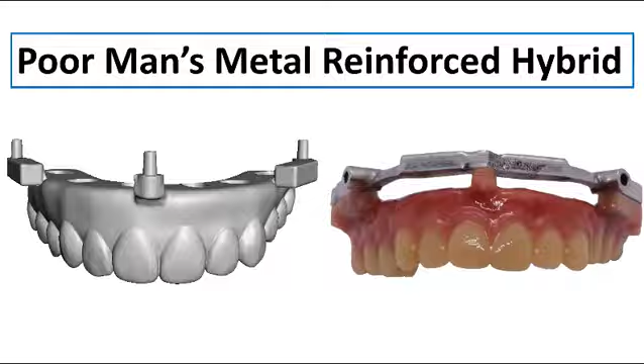Many of you may know I do a lot of immediate load implant cases where we have an immediate load restoration made ahead of time, and generally we print these. The downside to printing is that you don't have anything super strong reinforcing that, and there's always the potential that you could crack this thing through and through. So today I'll show how to use a cheap titanium plate that anyone can obtain off Amazon and build that into this hybrid so you have a super strong restoration that's very difficult to break.

Full disclosure, this is the first time I've ever done this, and I'm just documenting it because I know it works. It's not really a question of that. But I was doing another project, and I happened to get on Amazon looking for a small piece of titanium plate, and I was amazed at how affordable it was.

You can find these 2 millimeter thick titanium plates on Amazon, about 100 by 100 millimeters, for $10. That would be enough titanium to reinforce 5 to 6 restorations, so we're talking about very minimal cost. What we can do is trim a shape to fit into the hybrid so we have that metal reinforcement. It's titanium, so it's super strong.

Honestly, I don't even know that you need the full 2 millimeter thickness. I think a 1 millimeter thickness would probably get it and be a little less trouble.

Just to give you the big picture of the process: we take our hybrid that we've designed—in my case a stackable hybrid to go on a guide, but it could just be a routine full contour hybrid with no stacking—and design and 3D print a template that we can lay onto the titanium plate to trace the outline. Then we trim that titanium plate to the correct shape and print the hybrid with the socket for that plate to go into.

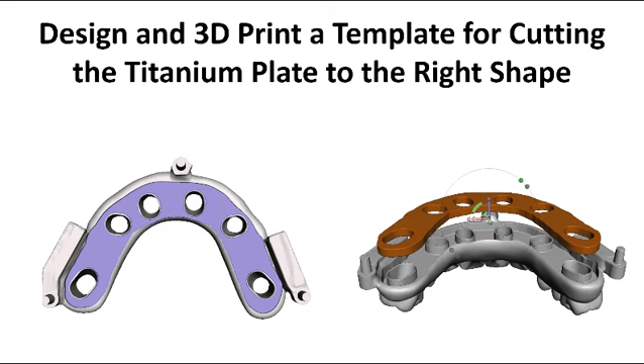Here's the idea: you can see I've printed my template, and we'll go over how to make that in just a moment. What you want to do is trace the template out—I used a round burr here because pencil rubs off pretty quickly. I tacked it down to the plate and went around with the round burr, tracing the outline as well as my pickup holes. Here you can see that it's been cut to shape.

This is a very fast technique in the software part, easier than a lot of others I've shown. The downside is that the cutting is by no means easy. After going through about 25 round burrs just to get about 5 millimeters of my cut done, I thought, this is not working. We've got to use some real tools.

So what I'd suggest, and this is the only real downside in my mind, is you're going to need to use an angle grinder to cut the outline, then come back and use a drill press for making the holes. You'll save yourself a lot of effort in spent burrs and that kind of thing. So you might want to have some real tools, and they're not expensive to get.

Once I had cut that titanium to shape and test fit it into the restoration, I knew it was fitting. I just thought it'd be cool to go ahead and anodize this.

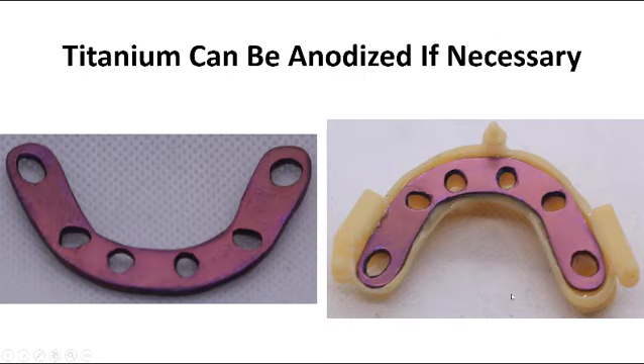Being titanium, that's one of the advantages over other metals, we can easily anodize different colors onto it. Since I'm going to be wrapping this in some pink resin, I thought it'd be good to make the bar pink so there's not any metal show through. If you don't already have a titanium anodizer, this is actually the unit I have.

Let me throw out the disclaimer that you probably should warn your husband or wife before this bill shows up on the credit card, because when I ordered mine from Painful Pleasures, I got a call. I'd used the Blue Sky Bio credit card, and I got a call from our general manager asking what I was spending Blue Sky money on. So I had to explain this is a titanium anodizer used in the piercing and jewelry supply business. I guess if you get a titanium belly button ring, you could have a different color for every day of the week.

But it's a super easy process. You can see this is $250, not a big investment. This will let you anodize titanium, anything you've got, custom abutments, reinforcement bars, all of that stuff, to a whole range of colors, basically every color in the rainbow. So you might want to look into this if you don't already have one.

I turned the bar pink, then went ahead and cemented it into my restoration that had the socket. I use a dual cure resin cement for that, because if you try to use just printing resin, there's no way you can cure through that bar to get the interface where it's bonding to the restoration. All that light's getting blocked out. So cement the bar in place using a resin dual cure cement.

After that's been done, I want to go ahead and fully encase this bar. So I chose to use Saremco denture-base resin. This restoration is printed out of Saremco's Crown and Bridge material, Crowntec. So I just used their denture-base resin and wrapped it so it's fully encased in resin, and I can get nice, smooth, polishable contours on it.

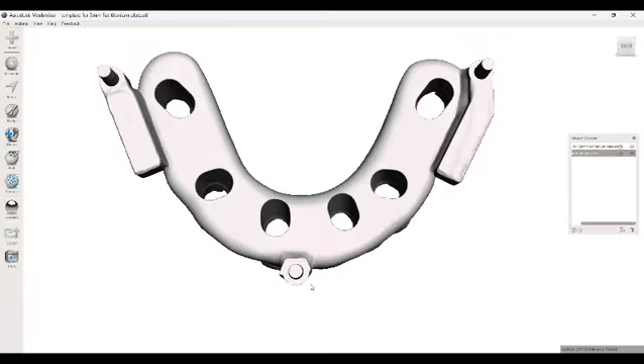So here you see this restoration. This is how I designed it, and right now this would be fine if you were just going to print or mill this, but there's no reinforcement of any kind in this. I've shown on many different videos a lot of different ways you can reinforce this—you can use Trilor, fiberglass, a custom metal framework. There's so many options. Again, this is just adding one more option to the toolkit.

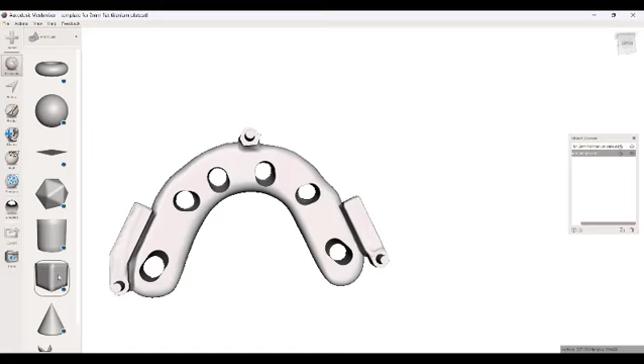I know this plate is 2 millimeters thick, so I need to create something that will fit inside of this restoration and have about 2 millimeters of thickness. So what I'm going to do to start that process is take this, and using Meshmixer, grab just a primitive shape here—this is a cube—and drop it onto this where it's going to be oriented pretty flat to the bottom of the surface.

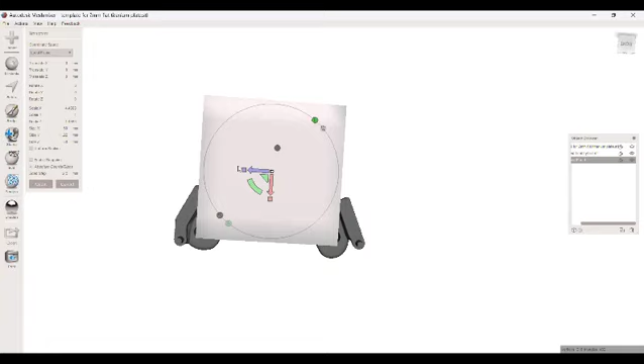We'll accept that. Now I'm going to go ahead and expand this—we'll make it maybe 50 millimeters by 50 millimeters. Then you can just scale it manually to whatever distance you need. As far as the thickness, my plate is 2 millimeters thick, so I'm going to make this plate 2 millimeters thick.

Now I'm going to move this thing down, and if I need to, get it a bit more flat to the surface, I can do that. I pretty much want this as flat to the surface as I can have it. All right, so that looks good.

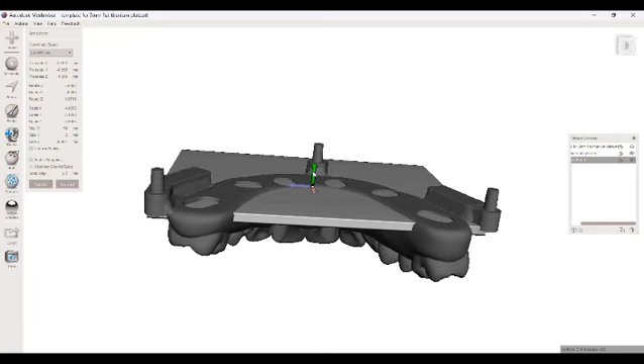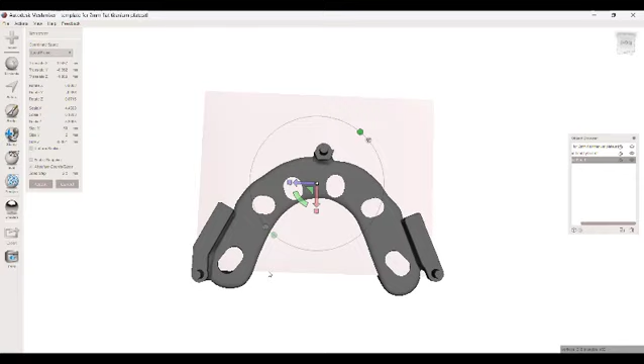I'm going to move it down just a little bit deeper into the restoration. You could even go deeper than this—in fact there's some advantages, you'll have a bit more thickness of material once you wrap it, because if you leave that wrap resin paper thin, there's a decent chance it could flake off. Okay, let's go with that right here. Also need to move this just a little bit this way.

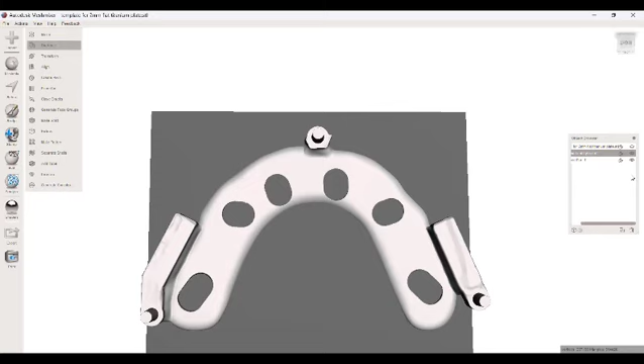All right, so now we've got a 2 millimeter thick titanium—well, this is not the titanium plate, this is kind of mimicking that, okay? What I want to do is a Boolean intersection, meaning wherever these two objects touch, it's going to get rid of everything else but that. But before I do that, I want to keep one of my hybrids in its original form. So I've got it duplicated, and now I'm going to go ahead and do the Boolean intersection.

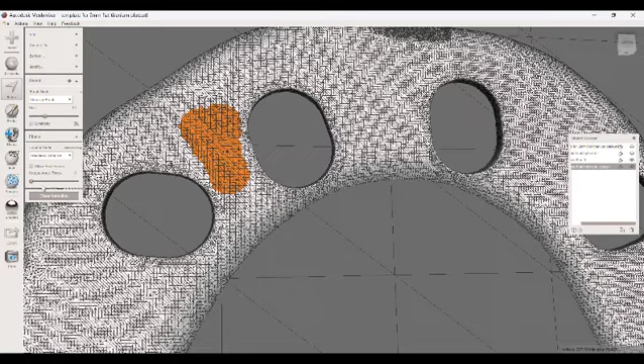Now, before you just jump to that, one thing that's good to know is if I turn on the wireframe, you can see my hybrid has an incredibly dense mesh of triangles—very high detail—whereas this has got just these ginormous triangles, not very refined. From experience, I know that Boolean functions don't seem to work well in Meshmixer unless you have similar triangle counts on the objects.

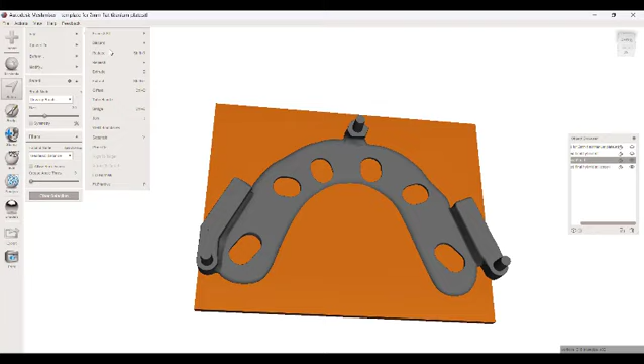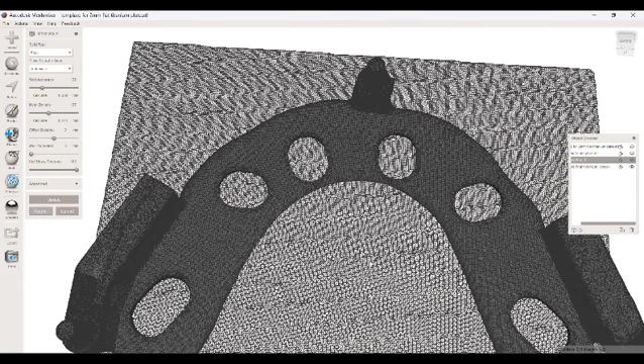So there's a couple of ways I could do that. I could just Control A and go up to remesh and increase the density of the mesh. But I've also found an easy and quick way is to just make solid—do you see how that basically kept the exact same shape, but now I have a much denser mesh? I could further increase that by increasing the mesh density and sliding this. So we'll accept that, and now this will perform much better in that Boolean intersection.

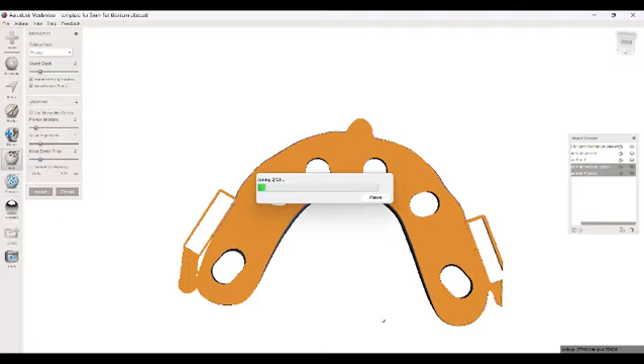It doesn't really matter which one you click first, but I'm going to control click both of them. When I do that in Meshmixer, you'll see Boolean intersection—go ahead and choose that. And there you see it's finished. I'll go ahead and accept that. And there we have it.

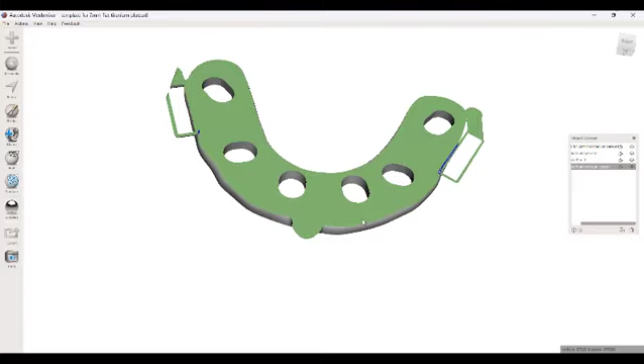So I could go and manually trim off these things, but let's go back and turn on our original hybrid right now. I don't really want this thing to go all the way out here to the edges—I want to leave that a little bit shy so there's no show through of that. So I'm not going to just make this the final template. If I was going to, I could simply cut off some of these little nubs and we'd be off to the races.

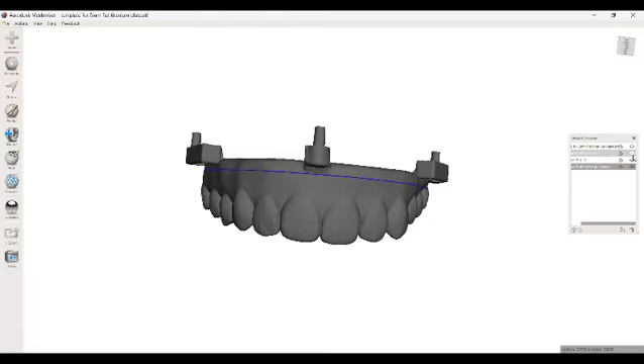Instead, I'm going to choose this face group that was created, then hit invert, which selects everything else, and delete all that other stuff. Now you can see this represents just a two-dimensional slice right through there in the restoration. I want to leave some thickness of the resin on the facial in particular.

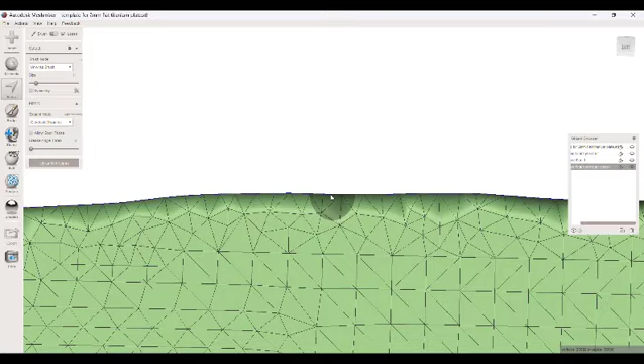So now, using my select tool, I'm going to double click one of the edge triangles. Sometimes it's helpful to really zoom in here. Double click that. Now I'm going to increase that selection - hold down shift and hit greater than. Your alternative way of doing that is to go under Modify and expand the ring, and just repeat that several times.

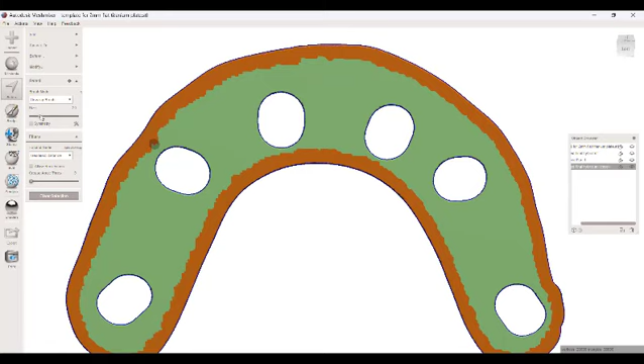I want to pull this in from the edges a decent amount. And if there's anywhere that I'm starting to get a little thin around my holes for the pickup holes, and I want to maintain some strength, I could go ahead and just erase a little bit right there, and maybe right here as well, and maybe in one more spot right here, and maybe right there as well.

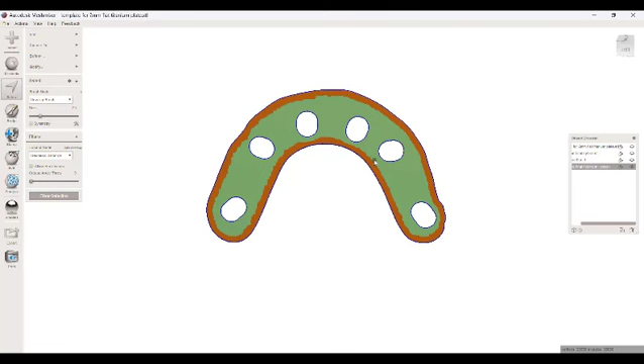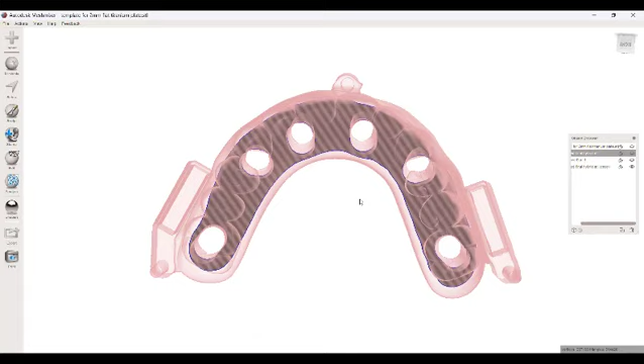I'm going to smooth this boundary of my selection, so I'll hit O for optimize boundary, B for smooth boundary, and I'm going to also increase the smoothness of that. Now we'll accept it, and then delete it. This is going to be essentially the shape of my reinforcement. Do you see how now when I've got this on transparent, it's pulled in away from the edges everywhere? That's really what I'm after.

So now we need to make the template. We've got the overall template shape, but we need to turn this into the actual template that's going to represent what we're going to trim the titanium to.

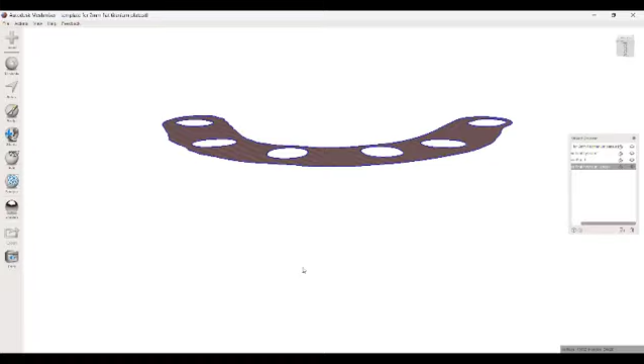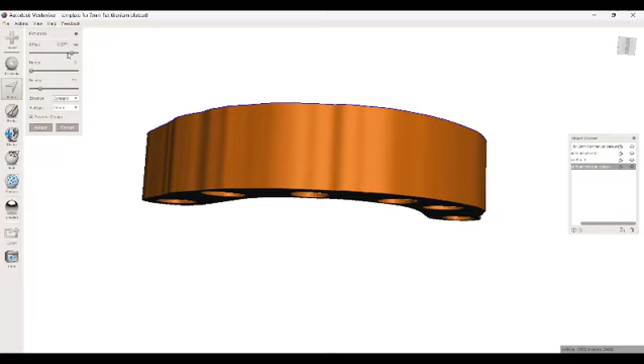Very simple way to do this. Notice this is kind of embedded down inside of that. What I want to do is Control A, so I've selected all of it, and now I'm going to push D - D is extrude. Remember that this was the back side of the mesh. If I cancel that, this is the back side, this is the front side. So when I push D to extrude it, the positive direction is going to come straight off the face of that. Well, I actually want it to go the other direction, so I'm going to make this -2.

Now that would be an exact representation of that 2mm titanium plate. So what I'll do real quick is export this, and I'm just going to call it template for bar.

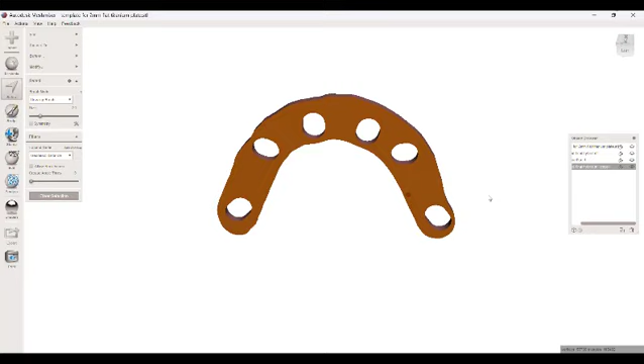So that's done, and now I just need to build in that same socket into the restoration. Now when you do that, you're going to see that this is not protruding all the way up through the restoration, and thus you would have a lot of hand trimming to do.

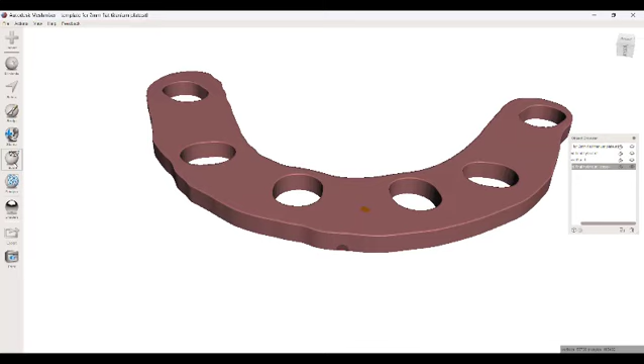But since I've already saved that shape, let's go back here now, and I'm going to create a face group out of all of this flat surface. So go to Edit, Generate Face Groups. When you do that function, it's just looking for changes in the contour. So generally, if you've got a big flat shape and then it's got these 90-degree edges, it will turn all that flat surface into a face group, and everything else will be something else.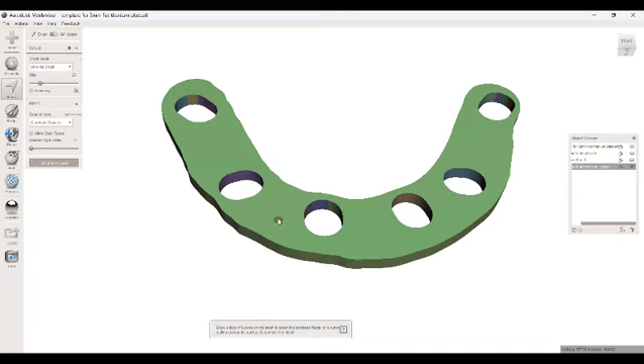That just lets me now quickly choose that top surface, and I'm going to go ahead and hit E again and just extrude this up high enough that it's penetrating all the way through the restoration, because I want to create that socket.

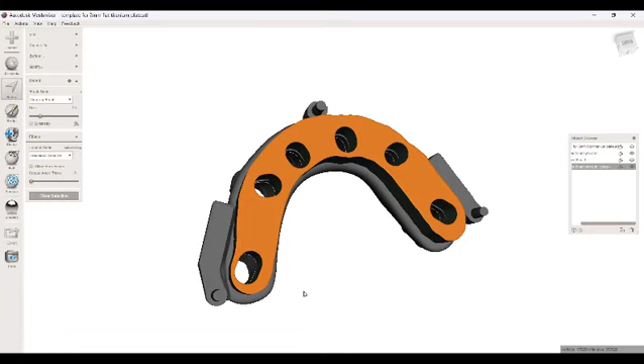So now we could just do a straight up Boolean difference here, but if you do that, you're not going to have any wiggle room or slop space around this. So what I would suggest you do is go ahead and offset this by just maybe 0.2 to 0.3 millimeters, just to give it a bit of slop space around that.

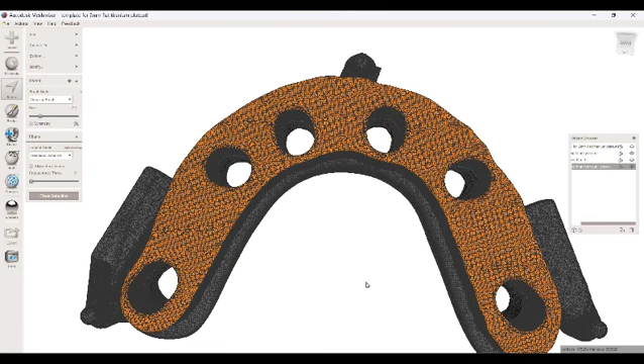So Control A to select it all, and I'm going to offset it by 0.2 millimeters. It's going to default to offset by the last distance you used whenever you did this, so I just need to change this number to 0.2 and then let it refigure.

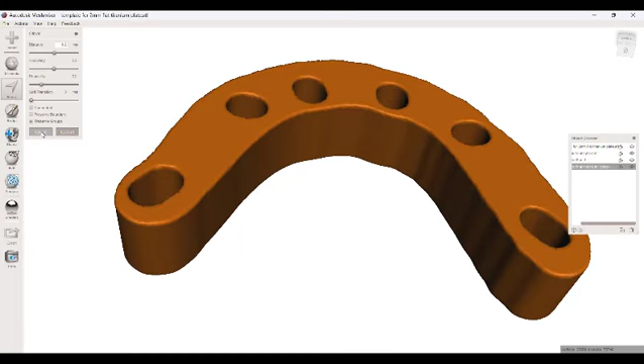Okay, now we'll accept it. You'll notice this is still selected. So what's selected is your newly offset surface. The original entire surface is still internal to this.

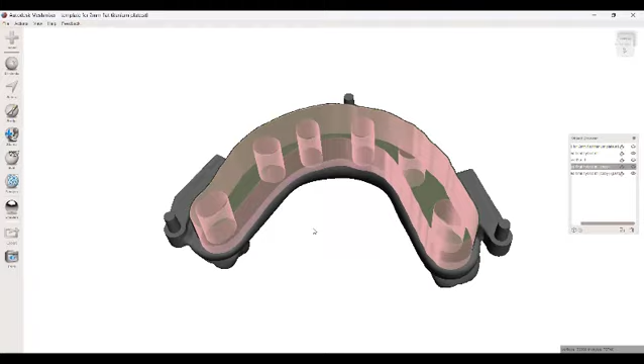While it's still selected, I want to separate this off into its own STL. I'll do that by hitting Y. You'll see now there's the original shape, and here is the newly offset surface. So what I want is this newly offset surface, and all I've got to do now is subtract that from my original hybrid.

So I'm going to choose the hybrid first. Always select the object you're subtracting from, then Control select this one in your objects browser, the newly offset surface. This one's going to be a Boolean difference.

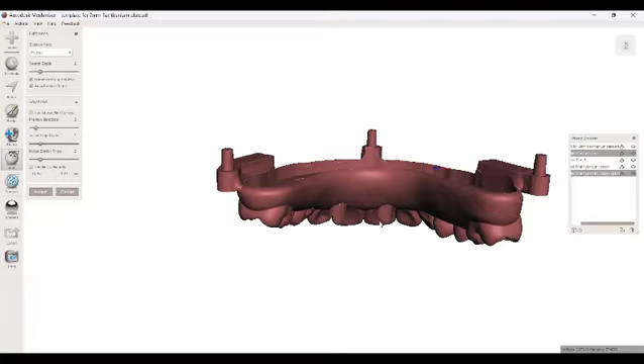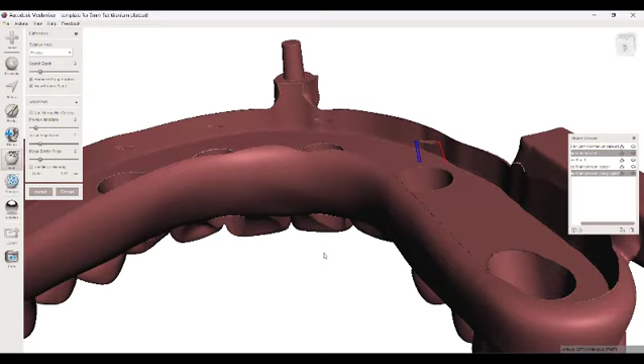And then we did have something fail here. I'll show this since a lot of times that's the trouble in Meshmixer, not knowing how to address little failures like this when you get them. So I'm making a note here: anytime you have a failure of a Boolean function, you're going to see either some red or blue lines pointing to something. Sometimes they're internal, so you may not see them, but make a note of where that is.

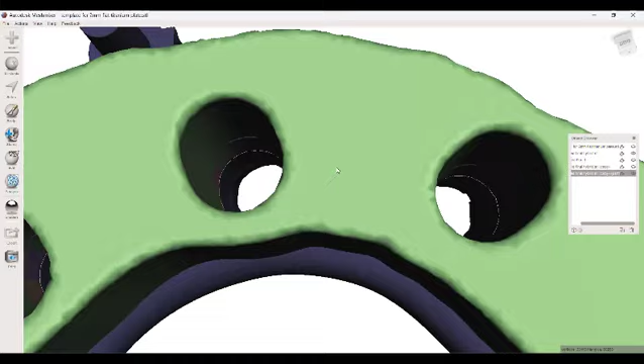Now I'm going to just go ahead and hit accept. It's not going to make it go all the way through, but now I need to look at why that failed. This will help if I make all of that hybrid a different color and make all of this a different color.

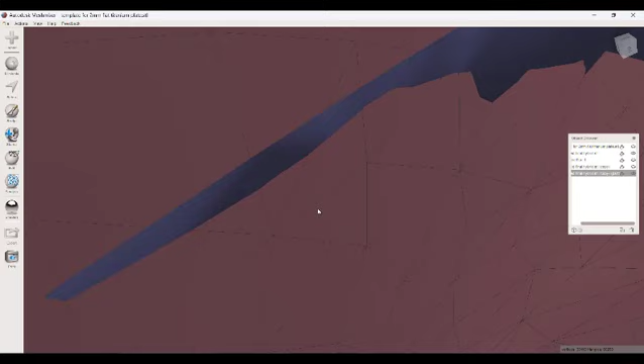So now when I'm looking through here, you see there's just this tiny piece of mesh that, if I turn on the triangles, you'll see is just so small here that in this area it can't subdivide those triangles. You can actually see that going on right here. Even though we've got a relatively dense mesh, it's just not working. So that's a pretty easy fix.

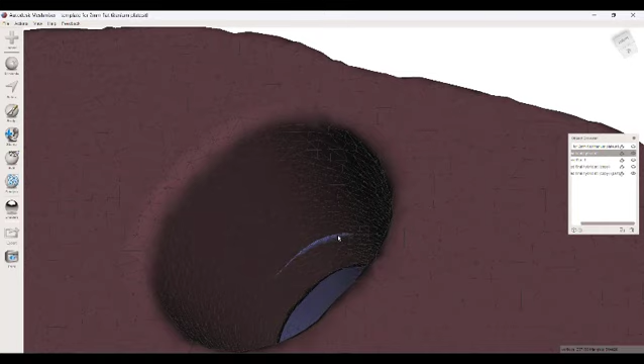What I'm going to do, since that's in a non-critical area, is use my sculpting tools and go up here and use the shrink smooth tool. On the hybrid itself, I'm just going to shrink those areas back where they don't even penetrate through. Even though these over here didn't fail, I'm going to go ahead and do the same on that. Now, in that scenario, when I was hitting shrink, it's not shrinking back to my liking.

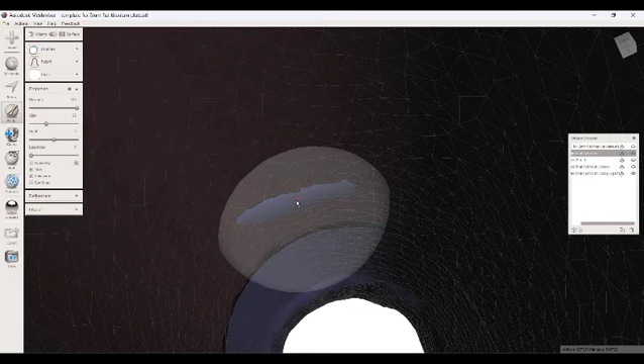So your other option is to use the inflate tool. If you just click, it's going to inflate this, but if you hold down control it's a deflate tool. Actually, it's control that you hold down. So I'm just deflating that area, and then I'm going to do the same thing over here, and we'll do that one too.

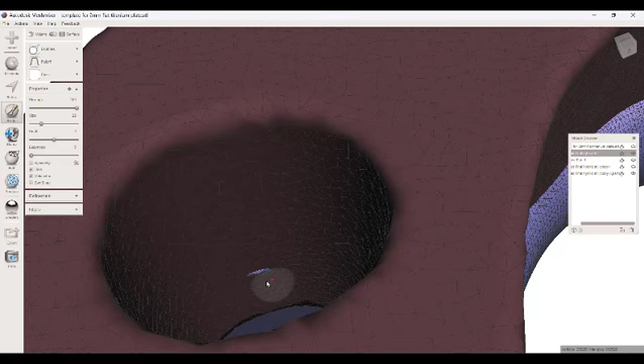Now let's give it another try. Control select, Boolean difference. And that time it worked with no problems whatsoever.

So we'll accept that, and what I'm going to do is just bring back in my original template. You can kind of see how this is all going to fit together. So let's import.

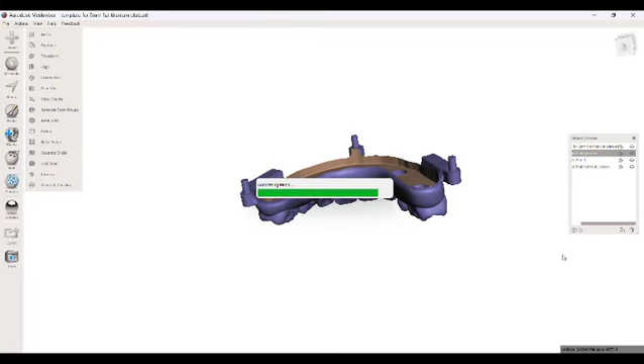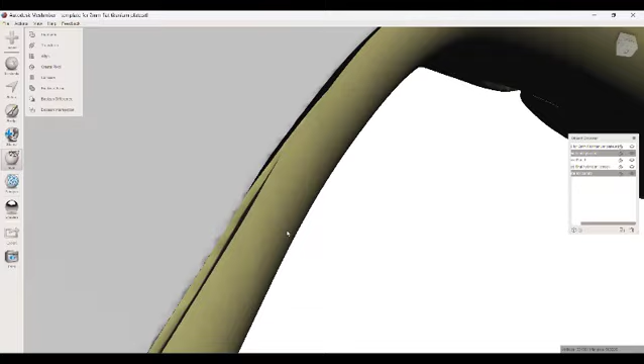All right, make all that a different color. So now you can see this is the bar inside of that. If I print that template, trace it out on that titanium sheet, and cut it to this exact shape, then it should fit down in here, and you can see it's got a little bit of slop space between it.

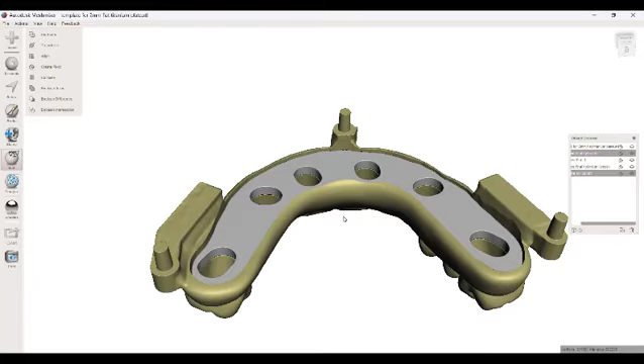Even once I've done that, you'll see it's still inset by maybe a millimeter or so on the bottom, which will let me fill in and wrap around this bar in another resin. Again, in my case, I use the denture base resin. That way it's fully encased, easy to polish, just kind of an easy scenario. So that's basically the process of how I did that.

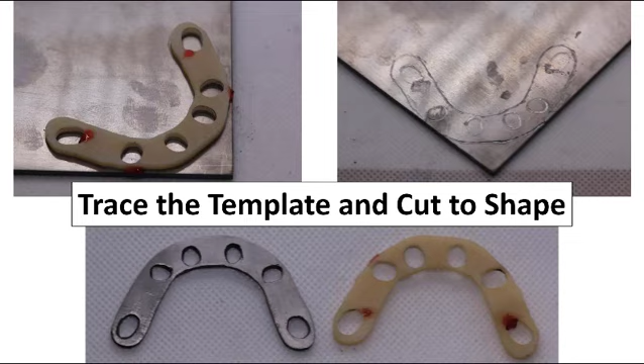Now you would just do all the steps I showed as we initially started this video. Again, you just print it, trace it out, cut it to shape using your bur tools or 500 round burrs, whatever your preference is. Then you can anodize it and bond that in. Do use a dual cure resin cement to bond in your bar, and then just fully wrap it.

And now you're just characterizing it with some gingiva like you would any other kind of printed or PMMA restoration. So anyway, I hope you found that helpful.